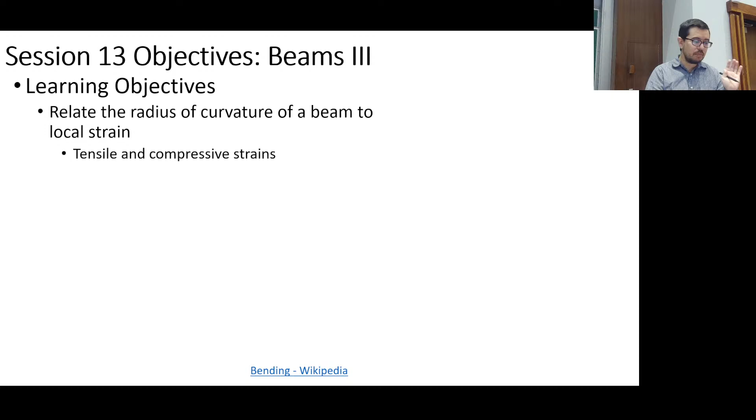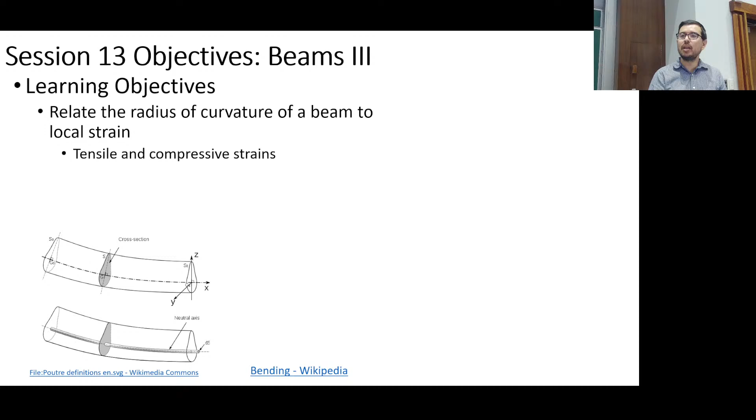So what should we be able to learn today? We want to be able to relate the radius of curvature of a beam to local strain. We're going to talk about how these beams curve, and this time discuss how that affects the strain along the beam. There will be tensile and compressive strains, and it will look something like this. Here's a beam being bent, with some radius to that bending, and we'll discuss what the local strains look like along that beam.

The other thing we'll look at is relating the internal moment to the normal or bending stresses within a beam. This is kind of a big deal, and it gets a name: it's called the Flexure Formula. Very creative, I guess.

That formula is going to be something that you can take with you, and it may even come up in an interview. It did for me for a job interview once. They wanted me to be able to calculate the bending stress along the beam. So after today, you'll have that key tool.

None of us is going to really remember all the equations we discussed in this class, but there are a few key ones we do remember. Flexure would probably be one. The difference between stress and strain. I had a friend who told me he was walking into his interview, and his buddy walked out saying, I couldn't remember the difference between stress and strain. So hopefully those types of concepts will stick with you.

And of course, we have some ideas concerning the bars, the rods, and the beams, and a little bit on the trusses. But that's really what we're covering. And maybe I'm a broken record here, but I'll say it again: if we understand how the loading that we apply to these simple structures affects the stresses and strains in them, it will be essentially pretty straightforward to figure out what the stresses and strains mean in much more complicated structures.

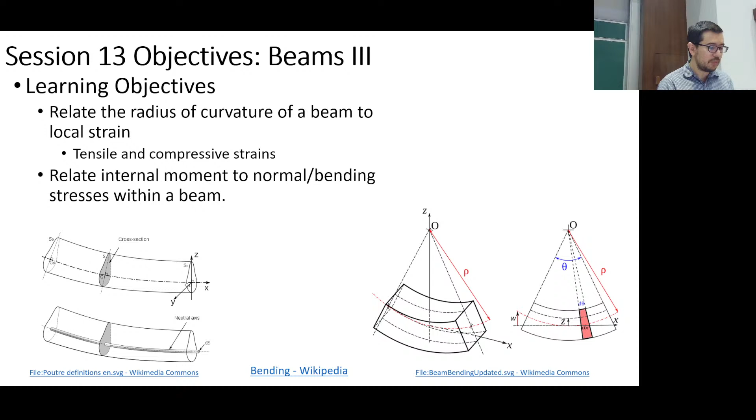That's another one of the essential pieces of information that we get to in this course. We'll talk about tensile and compressive stresses. Any questions, any insights up to this point?

How are you feeling about beams? Did you enjoy the graphing techniques you now have in your toolbox to figure out what the internal shear forces and internal bending moments are? Do you enjoy these integral differential relationships? Do you enjoy figuring out the boundary conditions on the left and right? Maybe not enjoy, but you have it under your belt, right?

Because the other key thing - and maybe this is foreshadowing purposely - we're relating the internal moment to the normal bending stresses within the beam. The reason why we care so much about calculating shear force is so we can figure out what the bending moment is. And once we know the bending moment, we have the opportunity to apply what we're going to call the Flexure Formula. The internal moment is very much directly related to the normal stresses that you have in the beam.

So in order to calculate those, it's the same old pattern. You spent a lot of time in statics trying to figure out the internal force, internal bending moment, or internal shear force. Then we said, hey, there's a way to figure out what the stress is for bars, and what the stresses are for rods. And so we're going to do the same today, except for beams.

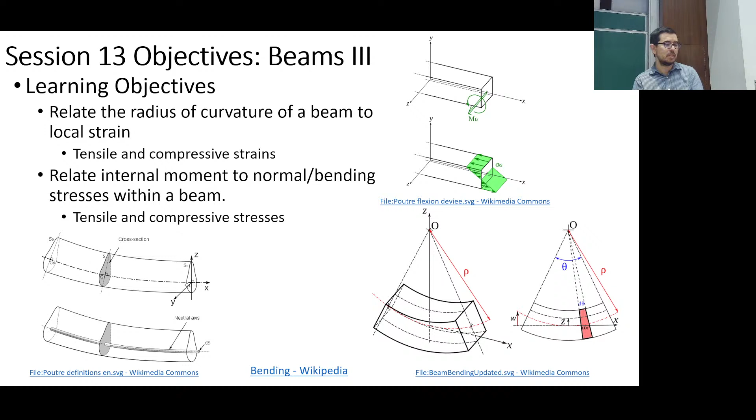Now here's kind of a review. What are we talking about here? We're talking about one of the very simple base cases for a beam and a transverse load on a beam. This is a cantilevered beam, and it has load P on the end, and we've already done this problem. In fact, twice you saw that I made mistakes in the slides on this exact problem.

You apply external - I'll go through this quickly, don't worry too much - but we would go through external equilibrium. We're going to know that we have a reaction force and a reaction moment on the left side; a wall gives us those two constraints. We are going to sum the forces in, let's say, the vertical direction, and we get that R and P are equal to each other.

We're going to sum the moments about a particular spot. In this case, we selected O, and they have to be equal to 0. So then we have our MR and our PL—that's just for the external equilibrium. MR is going to be equal to PL.

So what's next? We have different options. We could do straight up equilibrium like I did last semester, or use the integral differential relationships. In either case, now that we've talked about this quite a bit, it's not a bad idea to look at the values just to the left and just to the right.

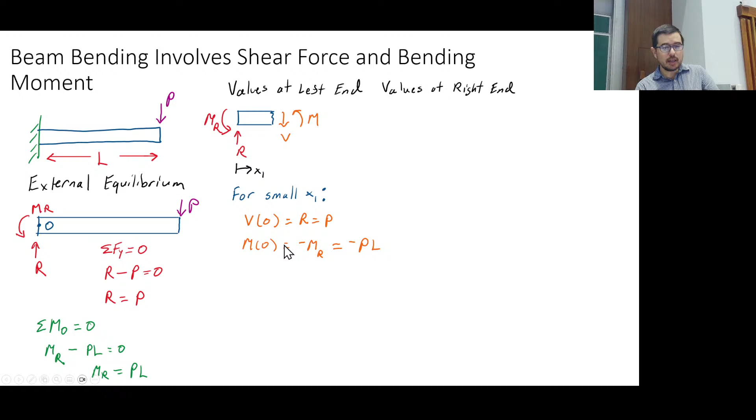And for the right side, we're going to do a similar drawing. At this point, I think we went through things a little bit fast at some points in the last meeting, but there should be an appreciation now for how going from a different direction affects how we plot things.

Maybe the simplest examples are when you have that concentrated moment or a concentrated force. If I'm going from left to right, and I have a force applied upward located along the beam, that's going to be a delta V going from left to right, positive F, whatever that applied force would be, upward. But if I'm coming from the right side and I hit that force going upward, that's actually a jump down. And the same thing is true when you have these concentrated, or coupled, moments.

So here we follow the convention—and again, I'm probably saying it ad nauseam—externally, when I chose this R and this MR, I didn't really reason it out, I was just using whatever my gut told me would be a great idea. But ignore that gut feeling when you start looking at the internal bending moment and internal shear force. You've got to follow the convention.

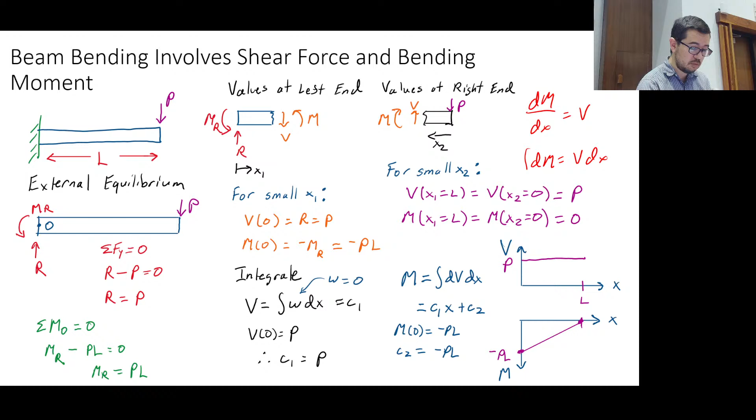Yes? Why for the moment equation for the integral is it dx? Okay, let me just write here. Remember that we have that dm/dx is equal to V. So then I multiply both sides by dx, and then I take the integral. All right, no problem.

Now once we have this ability to write out these shear force and bending moment diagrams, we're doing awesomeness. That's great. What does it really look like though? These are going to be my very crude drawings. So that is a beam.

I've drawn these boxes so many times. My daughter came to the office one day, and multiple kids came to the office, and I was drawing. I was like, okay, so what do you do? I was trying to draw something just on the chalkboard for them, and I did this very simple perspective. They said, wow, you're good at drawing. I said, no, not really, I just know how to draw boxes.

Okay, so here's a box. All right, let me see if I lost my thing. Hold on a second.

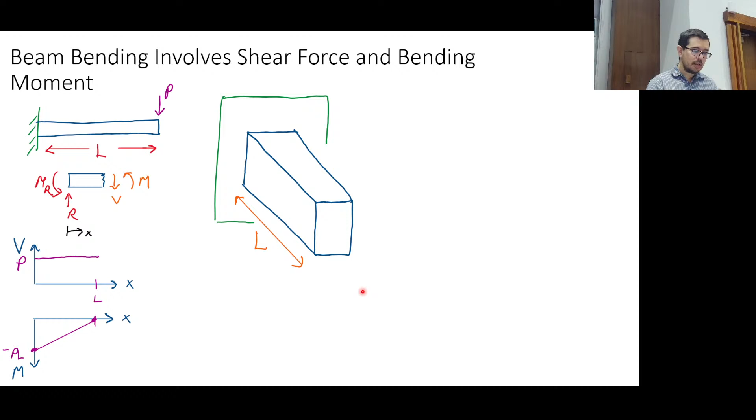All right, so here's our box, and here is the beam that's kind of connected to that box. It has some length, and it has some force P, like we see there. If we slice this system, as you see here, that's my way of saying it's sliced. Imagine you have a really bad knife, making the edges all look serrated like the knife itself.

I am going to draw a shear force that is following my convention. So what is my convention? If I look at this thing, I've kind of cut the right side, or removed the right side, I'm covering up the right side. Remember this convention, this is the V that I have, so that's going downward. So if I slice it and I'm looking at it here, my V is downward and my V is equal to P. So that should give us a little bit of an idea of what's happening.

Now, we won't talk about these shear forces today. We are talking about the shear forces, but we won't talk about the shear stresses related to the shear force today. But can you imagine? This is a force acting on a surface parallel to the surface. So what does that mean? That means there are going to be shear stresses that have little itty bitty forces associated with them on the little dA's. But we're not going to talk about that today.

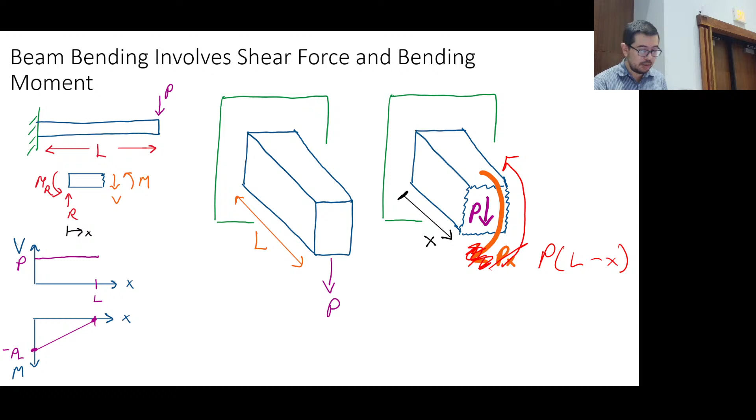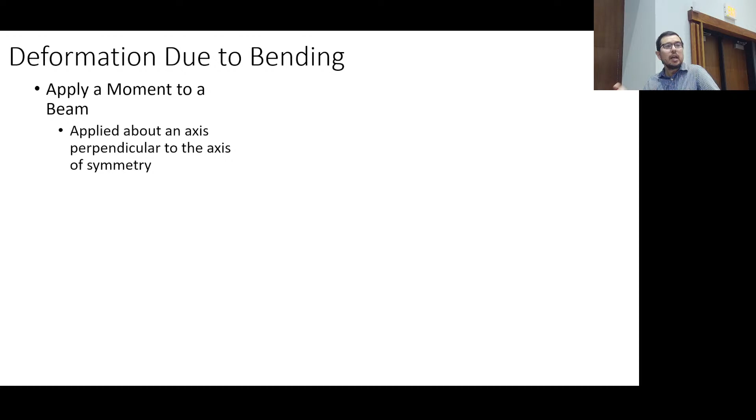Let us continue. So if you already have an idea of how to apply a torque to a shaft, right, essentially you can think of it as the screwdriver, the length of that shaft going into the screw that is trying to either tighten or loosen, okay? So now what we're going to do is apply something that has units of force times length, and we're going to apply that to a beam. Okay, so here's another one of our beams.

And we're going to say that it has some coordinate system like this, and we're going to apply some type of moment to it. All right, now...

If I take this lovely chalk eraser, this is going to make my hands all messy. All right, and this is hilarious too - this is not really for chalk, right? This is actually a dry erase, yeah, it even says it. Okay, but anyway, if I take this, now you see I've got a moment that I'm applying. That's actually pretty - this is the power of surfboards right here. Anyone surf? Right, we had a surfer, right? Yeah, you surf, right? So why is this demonstrating the power of surfboards? That's right, it's got a foam core, right, and that foam core is pretty thick, actually, right? And it has a very, very thin shell around it, which is usually - well if you use the kind of boards that I use, they're cheap, so some type of fiberglass, right? But high-end stuff now people use carbon fiber composite and all that jazz, right, or straight up epoxy, it just depends.

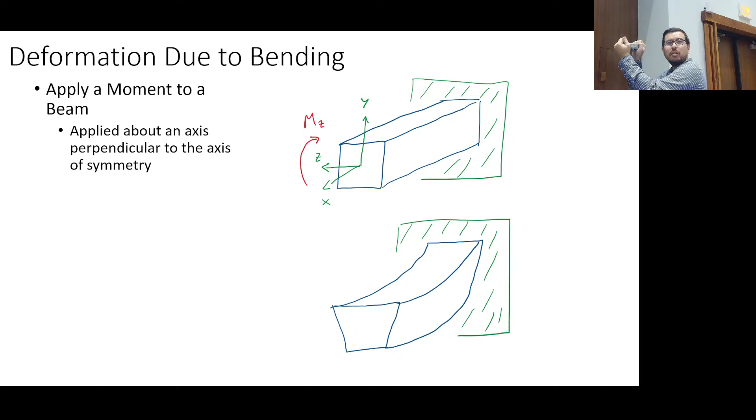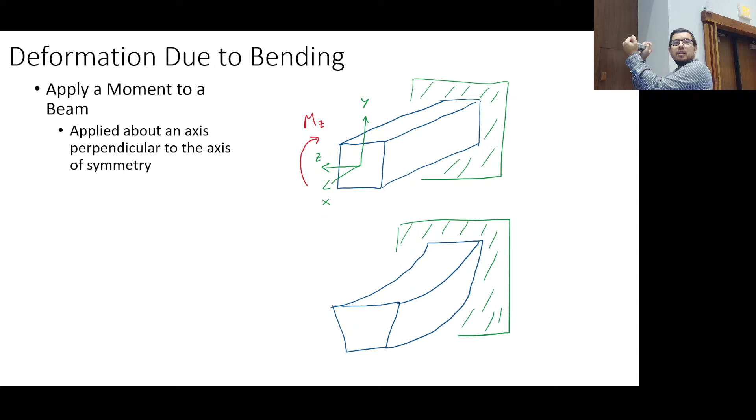Or eraser, better eraser, right? If you apply this type of moment—or you take that, is that electric? Is that electric over there? All right, yeah, those are fun. I've only been on one for a couple seconds, but they're fun. Okay, so yeah, whatever, I got—that's an awesome thing.

All right, I'm distracted. Okay, so you see that as I'm applying this bending moment, the top is going to be in compression. One way to look at it: this point here and this point on the top—both of these points, as I apply this moment, are getting closer to each other. And the points here and here on the bottom are getting farther apart. That is quintessential compressive strain and tensile strain.

Yes? So how does this compression relate to the buckling of the material once you push even harder? Okay, so buckling by definition is not related to the strength of a material—it's related to the stiffness of the material, the elastic modulus. We're not going to cover buckling this semester, we'll cover it in the next class.

But yeah, what happens is if you make your beam super long, there becomes what we call a slenderness. Like if you take a constant cross section—if you take me and extend me by two feet, I'd be a reasonably sized basketball player. Well, actually, a foot and a half would do it. You get a basketball player. I'm okay with my body image.

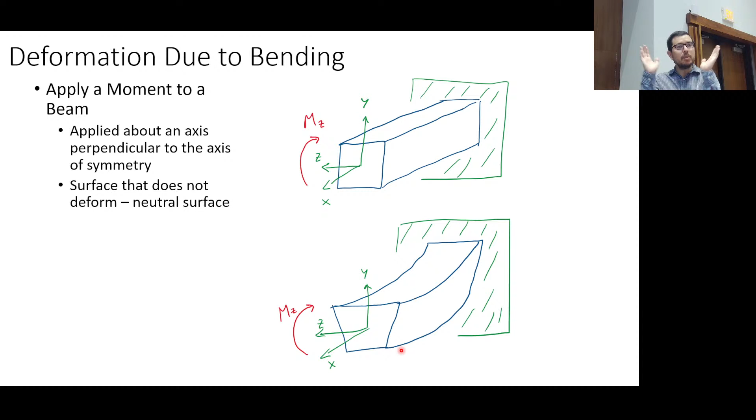There is a surface, okay, and it's not my Microsoft Surface. It's a surface that is called the neutral surface that actually does not deform. Can you imagine that? What are we talking about? We see that this top is in compression and this bottom is in tension, and probably you can even see this business of the sides, it goes wider at the top and skinnier at the bottom. So there is a region, a surface, where it does not experience any strain.

This is key. If you are a designer and you have something precious that you don't want to experience deformation, a good place to put it is on the neutral surface, because it's not going to experience any tension or compression there.

And so John Rogers and his research group, they have leveraged this idea quite a bit, this very simple principle, in flexible electronics. Even when you take your handy-dandy extension cord from the wall, you notice that there's insulation wrapped around it. If not, well, it wouldn't be very good to handle. So if you take that cord and bend it, part of the insulation is undergoing extension and part is undergoing compression, and the material in the middle, if it's close to the middle—and of course you have conductors that have some thickness to them—but the thinner that wire is, the closer it is to the neutral axis, you can actually bend it quite a bit. And nothing is ideal, so if I bend it back and forth a lot of times, eventually it's going to fail. But you're going to see that the insulation, even though it's rubbery, might fail before the wire itself in the middle would fail. And that's because of the physics of this neutral surface.

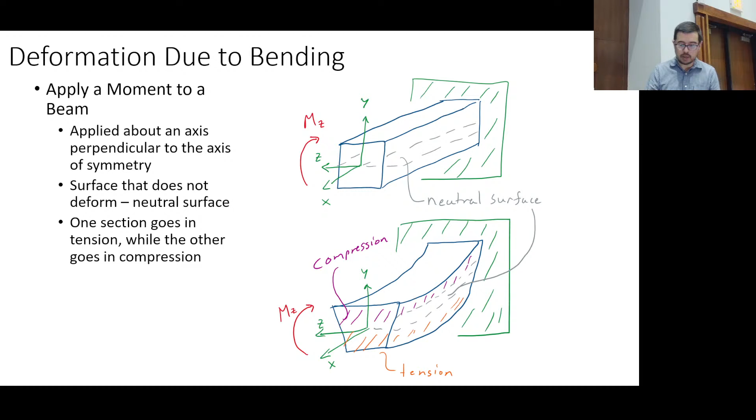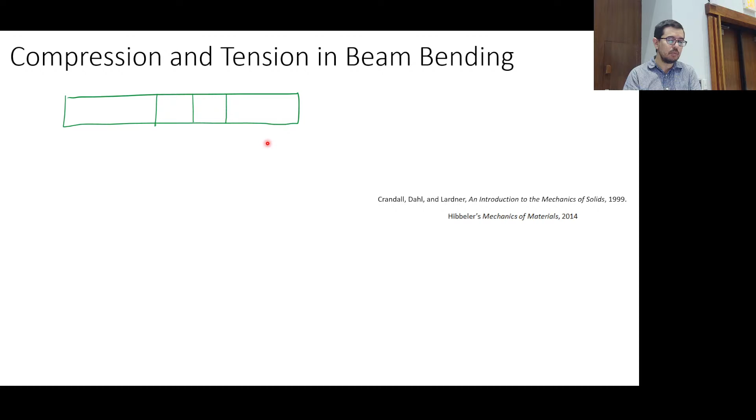Now, let's take our beam and break it into a few different sections. So this is a beam, going from left to right, and we're just breaking it into sections, and we're going to call these different sections by their names. So we have like an A, B, D, E, or A, B, E, D section. You have a B, C, F, E, or D, E, F, C, whatever—you have these different sections. And we're going to put a bending moment on this beam, and we're going to look at what happens to A, B, the relative distances between A, B, C, and D, E, F. And you already know, after that whole discussion, what's going to happen.

You know that if I apply a positive bending moment—what is a positive bending moment? A positive bending moment is when you have our convention in place, and whoop, that means smiley face. So we're applying, you see that, these are our conventions: on the left side, it's clockwise, on the right side, it's counterclockwise.

We can see that A, B, and C are going to get closer to each other, while D, E, and F are going to get farther from each other.

So we can call... and you remember we kind of did this when we were talking about the pizza and the torsion on a rod, right? We had all these stacked pizza slices, and a little pizza, and I was like, hey, how does this location move relative to this location when I twist it? We're doing something very similar here.

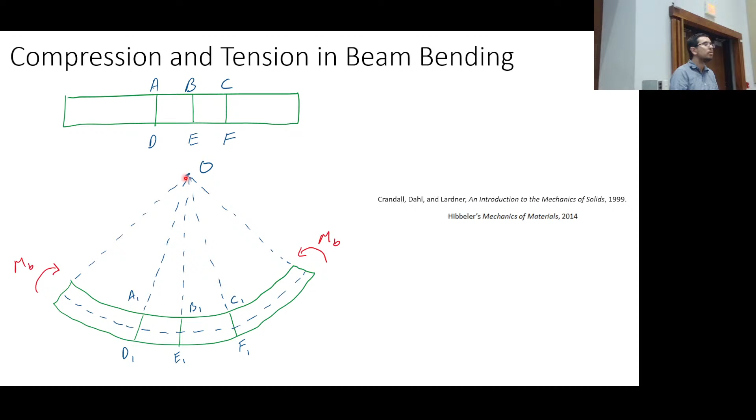So D1, E1, and F1, those are going to describe the new locations. And what we're going to see here is that now there is a center, point O, for the radius, or for the circle essentially, or the semicircle that we are carving out with this bending.

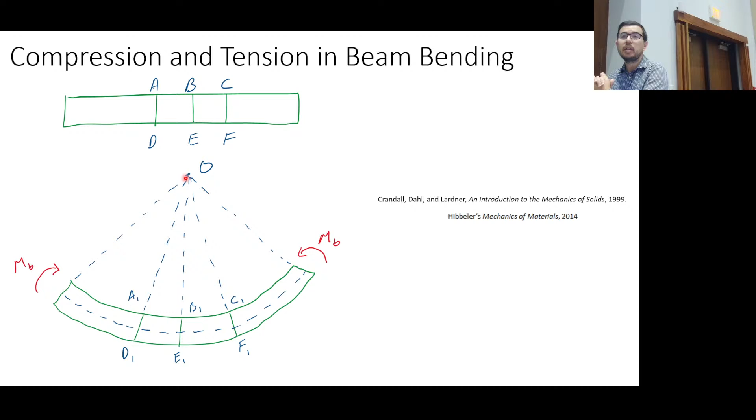The length, what do you think we're going to call the length? Well, we did it in shafts too. We're going to call that length, or that radius, rho. So rho is going to be what we use to describe how far we are from the center, right?

And we discussed that C was... okay, don't worry, we're not there, but this is focused on rho. Remember, C was the actual radius of the rod or the shaft, right? And then rho was the distance from the center line to some location. So rho, once again, is going to be what we use to define a radial distance.

And then we can see that even though you see A1 and B1, they're closer to each other, D1 and E1 are farther apart. Well, maybe it's not very clear from my drawing that A1 and B1 are close to each other, but you see this, that we are carving out some angles here, okay?

That if I can look at the angle between A1, O, and B1, right? Or I can look at it from D1 to O to E1. And I guess I could have been a little bit more careful and said, hey, this length here between A and B is going to be the same as this length here between B and C, as is like the initial lengths between D and E and F.

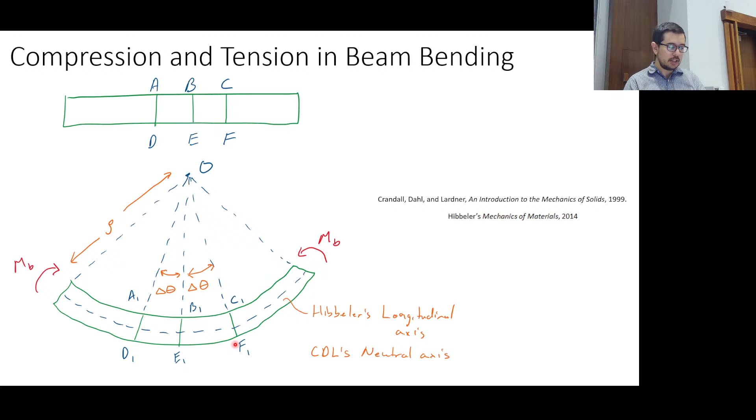Okay, so let's take a little bit deeper look at a slice of the beam. So now same thing, and this is the undeformed state or undeformed elements in the beam, and we're going to go ahead and take a look at...

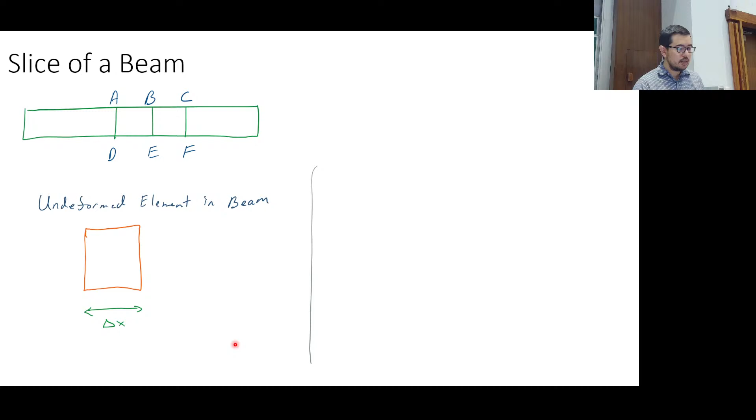It could be, this could be A, B, D, E, but really small, whatever it is, right? There's going to be now, but we're now talking really small, and this is going to be having some width of delta x. And the longitudinal axis, or the neutral axis, is going to go through it. You see this? We're doing another derivation, and what does it involve? It involves taking a slice.

Now we're going to define a distance. You saw we had this rho, that was a radial distance from the center line to some location in the beam. But there's also something we call y, and this is the distance from the longitudinal axis, or the distance from the neutral axis.

Initially, delta S is going to be equal to delta X. Delta S is the length between this side and that side. As we bend this element, what's going to happen? Delta S is going to change as a function of y, because if I'm bending with a positive bending moment, this bottom portion gets wider than this top portion. So now we've got this parameter delta S, and for very small widths, a line is very much like a curve, but let's just say this is the arc length, or the length, either way. So in the undeformed state, delta S is equal to delta X.

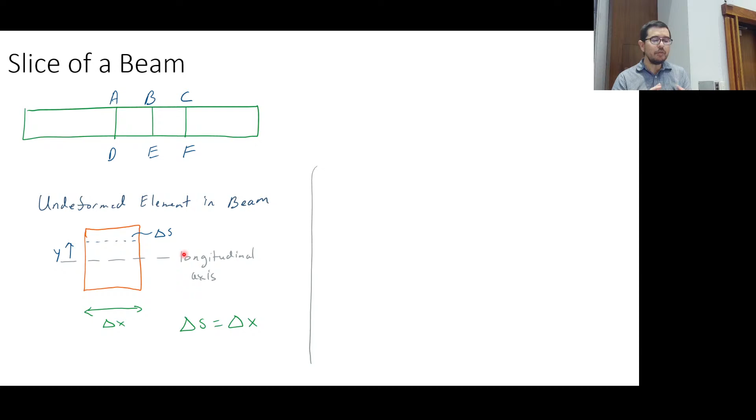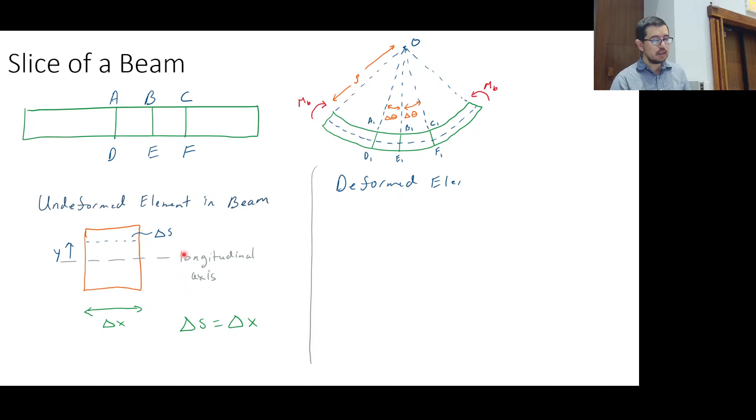In the deformed state, which is what we had in the previous slide, this delta S is now varying as a function of y. But first, let's set things up. This is the delta theta, going between A1, B1, E1, D1. And we had this thing we called rho, describing some distance to wherever we are. Let's say that distance is going to the neutral axis, and we can say that this delta X is going to be unchanged along this longitudinal axis. So the delta X here is the same as this delta X here.

And what do we do next? Well, we can define the new delta S as a function of y, as what we'll call delta S prime. And how do you relate strain to changes in length? What's the definition of a normal strain? It's the delta in the length divided by the original length.

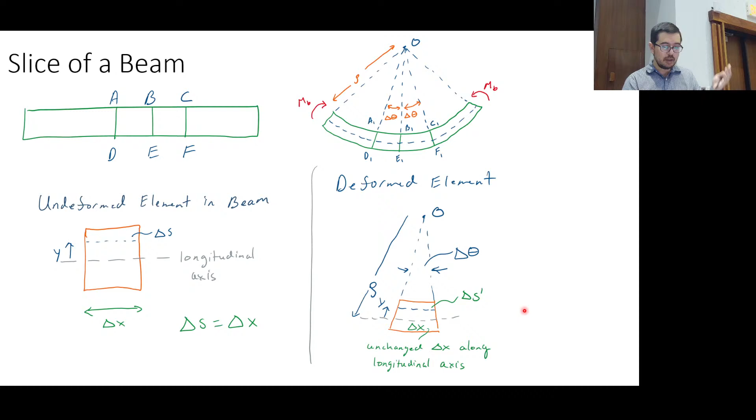So what do we have here? We have a change in length, like delta S prime minus delta S. And what's the original length? Delta S, or delta X. So now we have a way to figure out what the normal strain is as a function of a few different things, but y in particular, and rho.

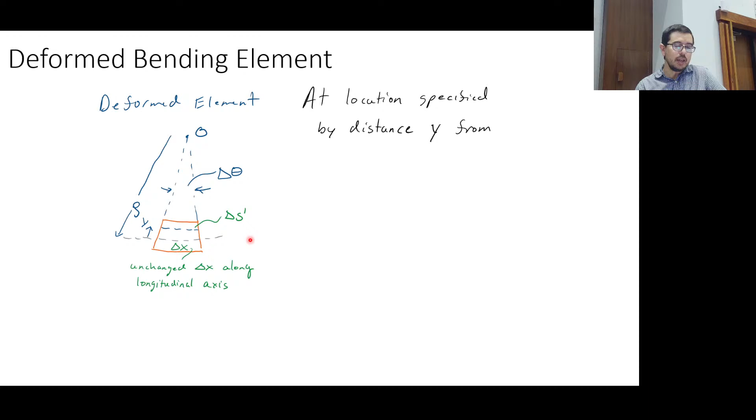So we have this, just copied and pasted, the same diagram. At some location specified by distance y from the longitudinal axis, we can have some delta S prime. And if we do a calculation of the normal strain, epsilon at some distance y is going to be delta S prime minus delta S over delta S. I didn't say the limit of that. And if we look at things, we can say the original delta S was equal to delta X.

And here's a new thing: if we say rho is the distance to the neutral axis, then rho delta theta is also equal to delta S and delta X. That's the arc length.

So now, what is this essentially, this delta S prime? Look at it: rho minus y is going to be a new radius to here, from O to here, and if I multiply by delta theta, that gives us delta S prime. So delta S prime is equal to rho, quantity rho minus y, delta theta.

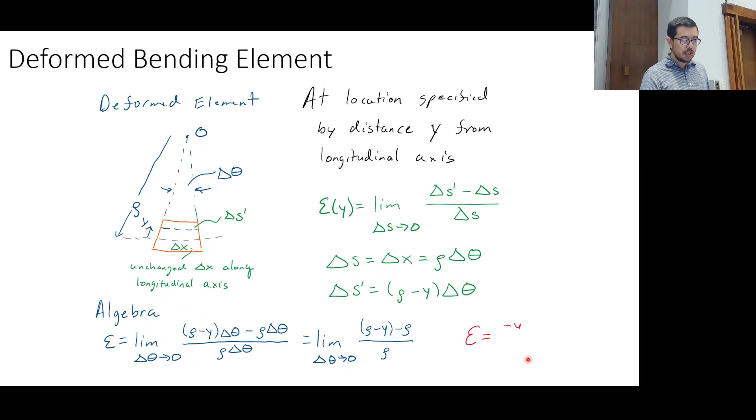And we do a little bit of algebra. This delta S prime is this, this delta S is rho delta theta, that's the denominator. We divide everything, we've got delta thetas all over the place, and then we have rho minus y minus rho. Well, rho and rho knock each other out, and we get that the strain is equal to minus y over rho.

This equation is not something that you're going to write home to your parents about. Okay, maybe the next equation we talk about on Flexure Formula would be something to write home about. I don't know, my parents probably wouldn't care, but maybe some of your parents would care. It's like, hey, I learned the Flexure Formula. It's like, yeah, all right, that's great, welcome to the club. Okay, but this is not that yet. But we're going to use this equation as we go further with our derivations.

Epsilon is equal to minus y over rho. And you should, of course, write this equation in your notes for the next exam.

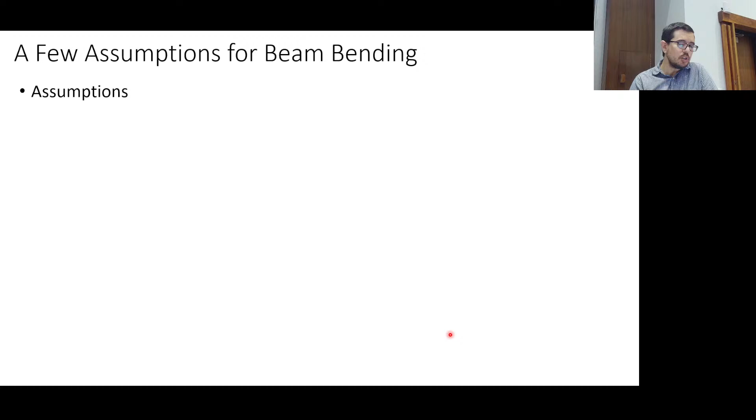Okay, so here's some assumptions. The longitudinal axis on the neutral surface does not experience any change in length. It curves, true. Okay, so we already kind of said that, that this is where you don't have any change in the length.

All cross-section planes remain perpendicular to the longitudinal axis. So this is just kind of saying, if I am interested in my bending moment and my shear force at a particular location, I take a slice, and it's going to be perpendicular to the longitudinal axis.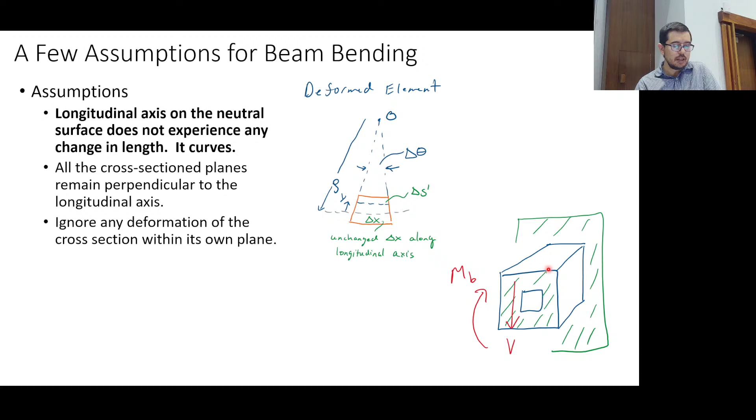It's not very clear here, but it's perpendicular to the longitudinal axis. Okay, that's nice. We're going to ignore any deformation of the cross section within its own plane. So we're not going to care too much about what's happening in the plane that we're slicing. And the normal strain is going to vary linearly with the distance from the longitudinal axis. That we've already said, and that is true.

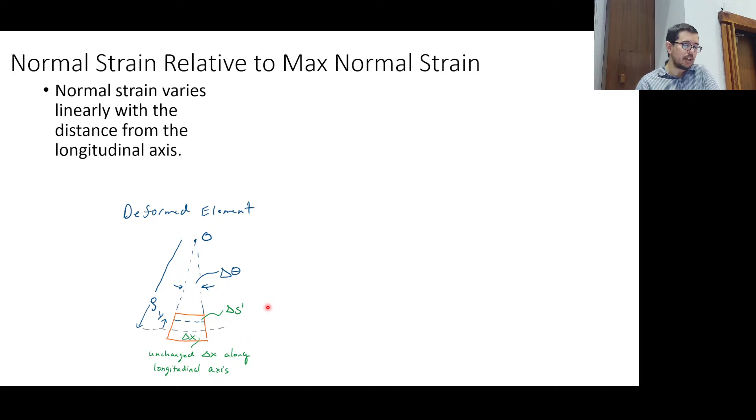And do you see that, just using this formula that we just described? Except now we're saying that, before it was minus y over rho. When you get to the outer surfaces, that strain is going to be the most positive or the most negative. And so sometimes, this is often more used to describe the stress along a beam at a given location, but here we're using it to describe the strain.

What do I mean? I mean you have a line that has a slope that goes through 0 when it's at the longitudinal axis or at the neutral axis, and it increases, or becomes less negative, or becomes more negative, or becomes more positive as you move away from that longitudinal axis. Okay, everyone see that?

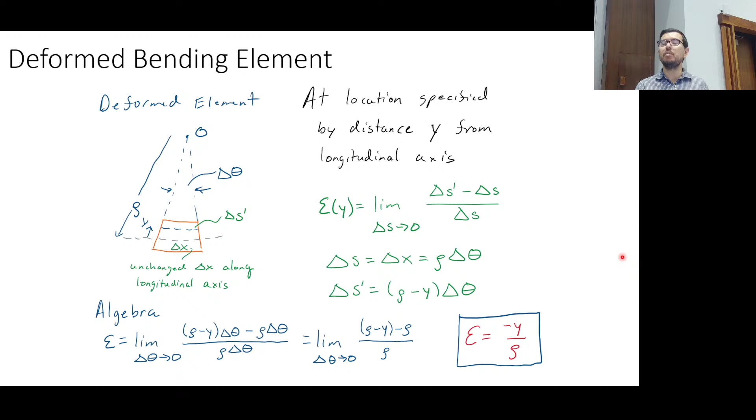What we've described so far is a strain. Right? A strain is equal to, right, we go back here. That's what we know at this point. We know that we have a strain equal to minus y over rho, but we don't really have a way of saying, hey, that rho is this for a given amount of bending moment, because it's dependent on a few different things.

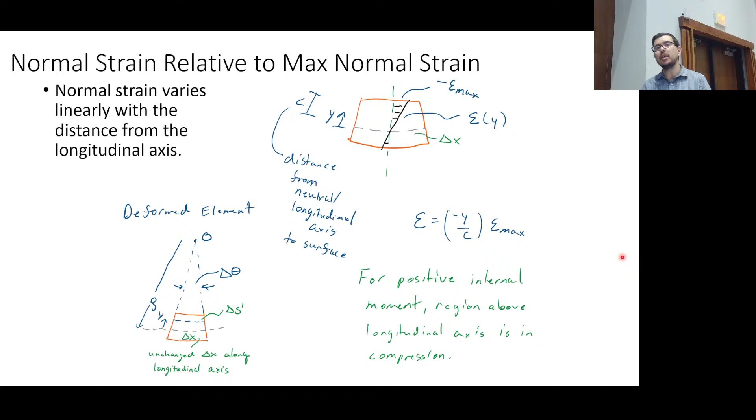Okay, so for a positive internal bending moment, the region above the longitudinal axis is in compression. And again, we've said that already. And the corollary is going to be that the region below the neutral axis is going to be in tension.

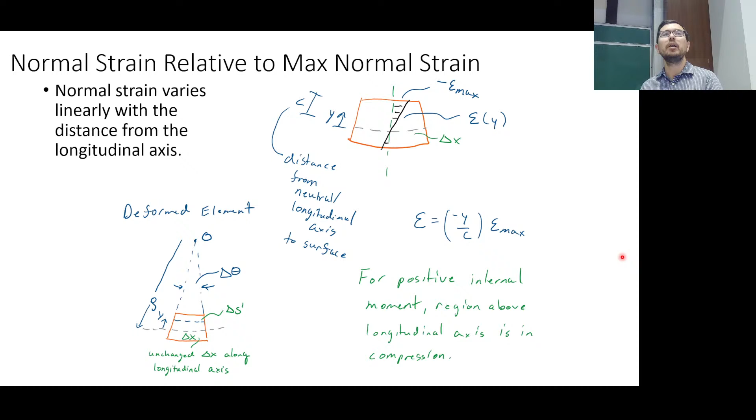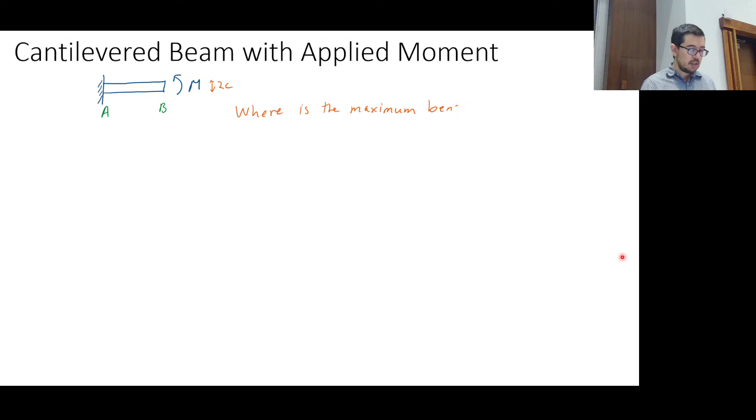Okay, so now, here's the cantilever beam with applied moment. And when we have a thickness of 2c, okay, that might not be clear, that's 2 times c, that's the thickness. Where is the maximum bending strain?

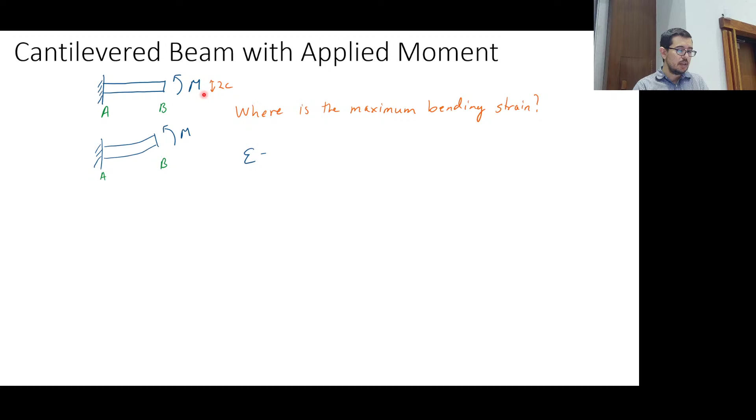It's not a trick question. It's going to be at a distance c, okay? And so, if we draw this thing out like this, right, it's going to be where we have c. This equation gives strain at an arbitrary distance, and the maximum bending strain is going to be where we have y equal to plus or minus c. So it's very important to remember that the maximum bending strain will be along the top or the bottom of the beam.

If the strain is a maximum at a given location, what does that mean about the stress? Assuming that we have a linearly elastic, isotropic material, it means that the stress is also going to be maximum there, right? Hooke's law, in whatever form we take it: sigma equals E epsilon, or the strain is equal to 1 over E times quantity sigma x minus nu times quantity sigma y plus sigma z, whatever we have. So that's where we're going to start seeing the maximum bending stresses as well.

So have you ever thought about that? There are a couple interesting things that this means. It means that your beams are experiencing maximum bending stresses at the outer surfaces. It also means that if you can strengthen the outer surfaces of these beams, that will prevent failure, right? Because there's no strain on the longitudinal axis, we just talked about that. So if you're worried about trying to make something that's going to be under bending stronger, what you want to do is make the outer surfaces stronger.

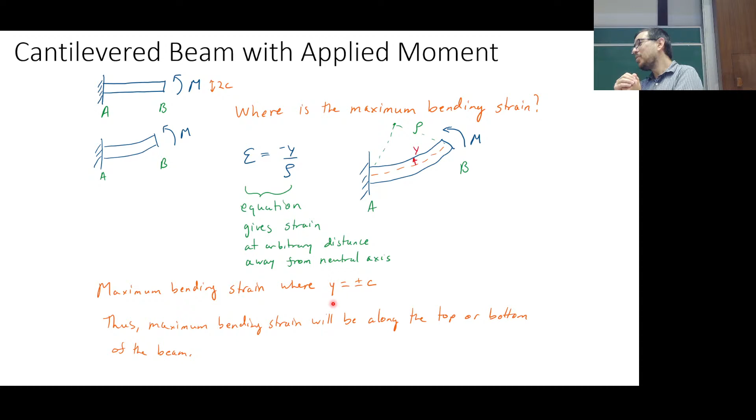Is the top always going to be like a circle? Well, if you have a nice, pure bending moment applied, yes. But will I give you that on an exam? No, unless maybe it's a thought question. But we're going to have transverse loading like a P, a couple force, a couple moment, applied force. External force makes it more complicated.

Distributed force, right? Yes. So just to clarify, the rho is always measured from the center of the radius of curvature, whereas the c is always measured from the neutral axis.

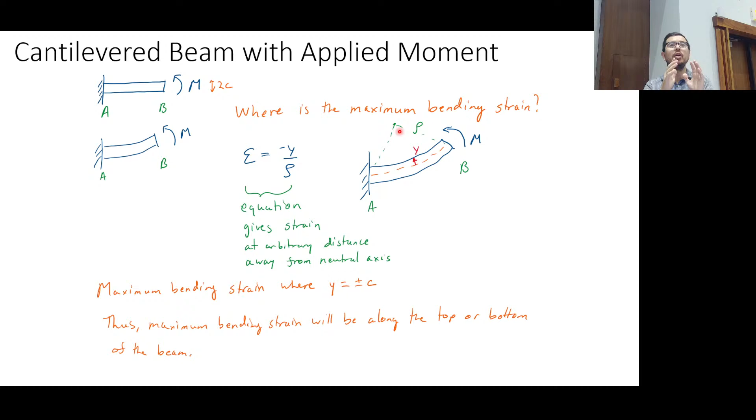Okay, so what I tell my kids about superlatives is try not to use them. You know, maybe I'm creating politicians, I don't know. So 'always' is a strong word. But yes, the rho is going to be what we usually use to define the angle of rotation between some center. This center can be moving, there could be multiple centers. If it's not a perfect circle, you could say, oh, at this location, since I know this is the strain and this is the y, that's the rho. And yes, the y is the distance from the longitudinal axis, and c would be the distance between the longitudinal axis and either the top or the bottom. And there are ways, the neutral axis doesn't always have to be smack dab in the middle, it's at the centroid.

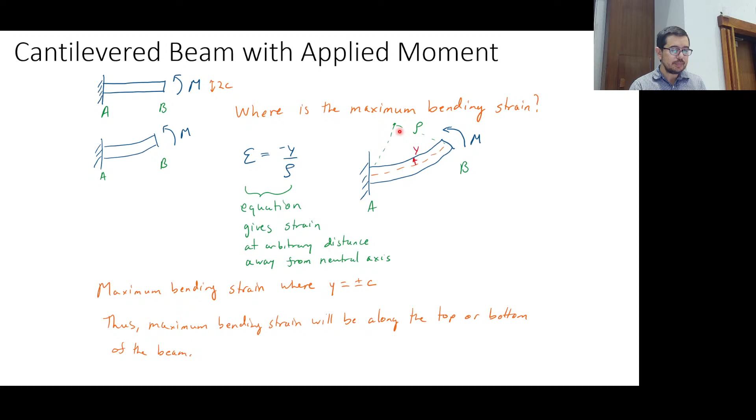All right, now the Poisson ratio's effect. The portion in compression can have a larger cross-sectional area with deformation. The portion in tension can have a smaller cross-sectional area with deformation. Yes, we believe this. All right, and we need to keep going here.

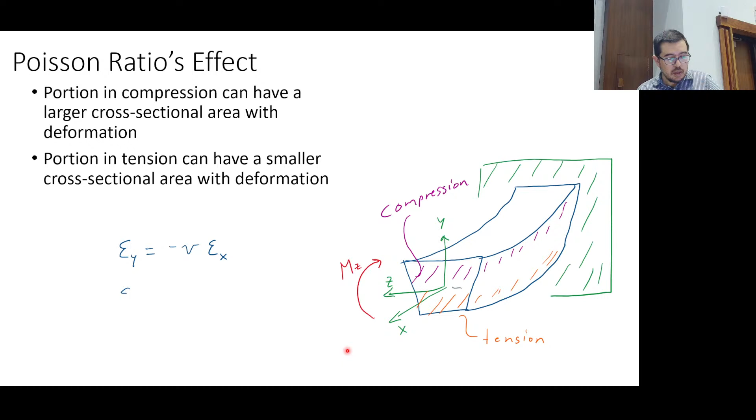But epsilon y is equal to minus nu times epsilon x. Okay, this is a true statement, and epsilon x in our case is along the longitudinal axis. And the same thing for epsilon z. All right, so let's keep going. This one's pretty straightforward, and it's pretty much just using the relationships that we said here.

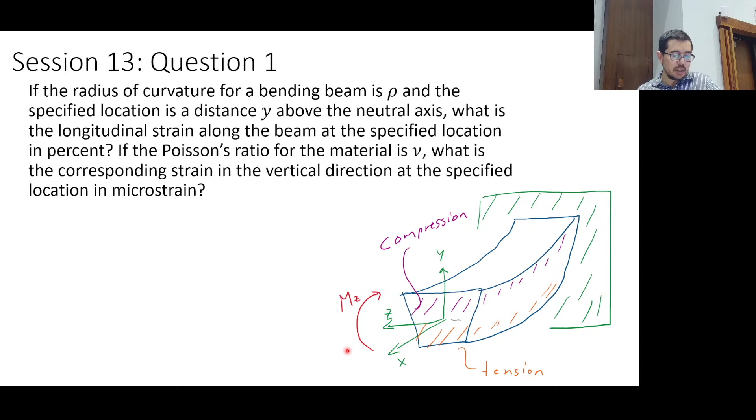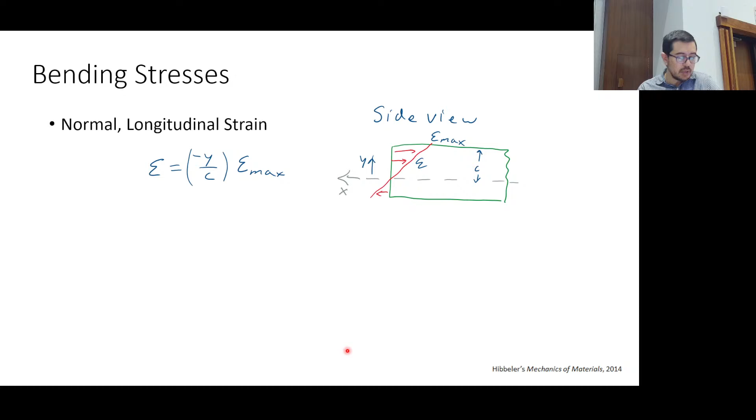Now, bending stresses. We've already defined the normal longitudinal strain. And if we look at this from the side view, you have this relationship that epsilon is equal to this quantity minus y over c times epsilon max. Now, Hooke's law tells us that for a uniaxial case, sigma is equal to E epsilon.

A bending stress is going to be what is the stress due to this strain. So you see what we've done here? We've said there's a minus y over c, keep that, there's an epsilon max, that's fine, I'll call it sigma max, and I'll divide by E. That gives me epsilon max. And epsilon is just equal to sigma over E, so I put that on the left side. So this is why that relationship was so important. The epsilon equals minus y over rho is now going to give us a pathway towards calculating out what the stress is.

Yes, we do care about deformations, but it doesn't really matter from a design perspective if you have the ability to calculate deformation but your stresses are through the roof and the thing is breaking or yielding. This is something to keep in mind with finite element analysis. With linear elastic materials and simple models, it's going to give you stresses and deformations regardless, but if you don't compare those to the material limits, it's kind of garbage. Anyway, that was another digression.

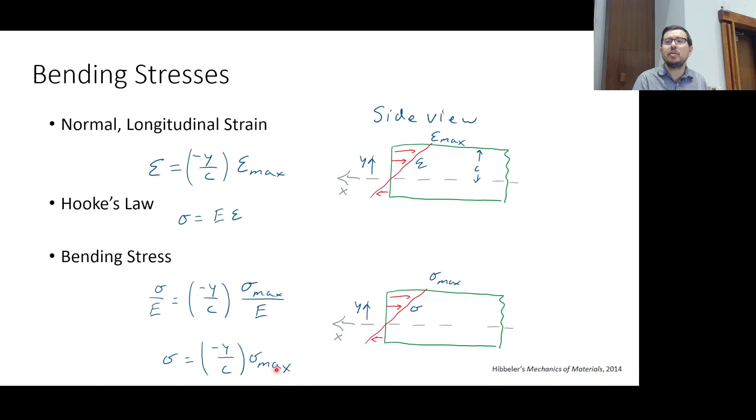What we see here is that there's going to be some bending stress, sigma, equal to minus y over c times sigma max. Again, that's not super useful because I don't even know what sigma max is. So what do we do?

We're going to take a look at how we can visualize the stresses on a sliced surface. Here's the idea: if I have a positive bending moment, the bottom region is under tension, the top region is under compression, and it varies linearly.

We've established this algebraically as well. If I think about all these stresses and take some small areas dA, each is like a little bit of force, sigma dA. And force offset by a distance is a moment, a torque. We have moment here, so you see where this is going.

There's something we have to introduce called the first moment of area. We'll get to that in a second, but here we have sigma equals minus y over c times sigma max. The summation of the forces has got to be equal to zero, and a force can be the integral of sigma dA. So if I take the sigma dA over the entire cross-sectional area and sum them all up, that has to equal zero.

That's because the second law tells us with statics that when the acceleration is zero, the surface is not accelerating.

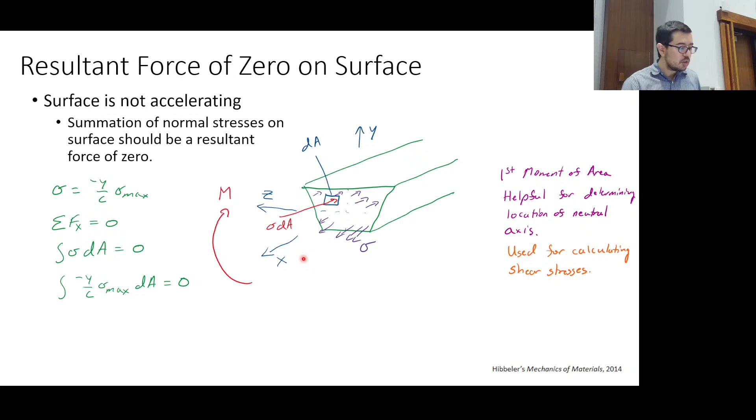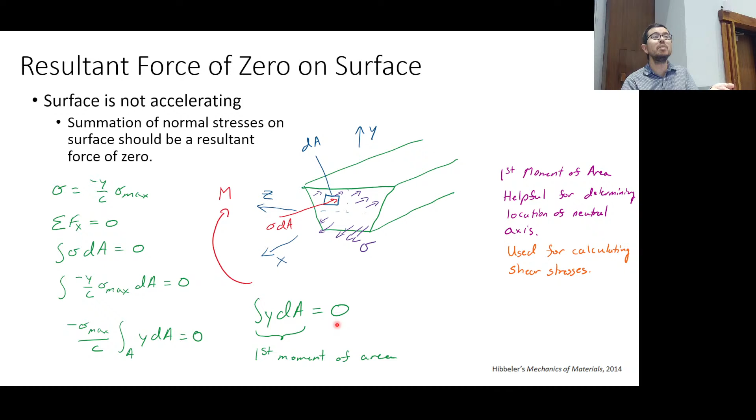But that was our discussion of equilibrium for the forces. What's our next type of equilibrium? Equilibrium for the moments. So when we have this cross-section, the summation of the moments has got to be equal to some moment M, because we see that here.

We can say that M is equal to this integral, y sigma dA. Remember, y is the distance away from the neutral axis, and sigma dA is the force at a particular small area. These dAs could be slices across the entire beam now, because we have a y and this sigma dA, and that dA could be across the entire cross-section.

So we have y sigma dA. Sigma can go in here, this is that big mess. We had y here already, and we had another y, so that becomes y squared. Now we have that the moment is equal to minus sigma max over c times this integral of y squared dA.

This is a geometric quantity. Both the first moment of area and the second moment of area are things dictated completely by geometry—there's nothing in this that says force, moment, or stress. This is completely based on the geometry of the cross-section. And then we define this second moment of area as the integral of y squared dA—that's I.

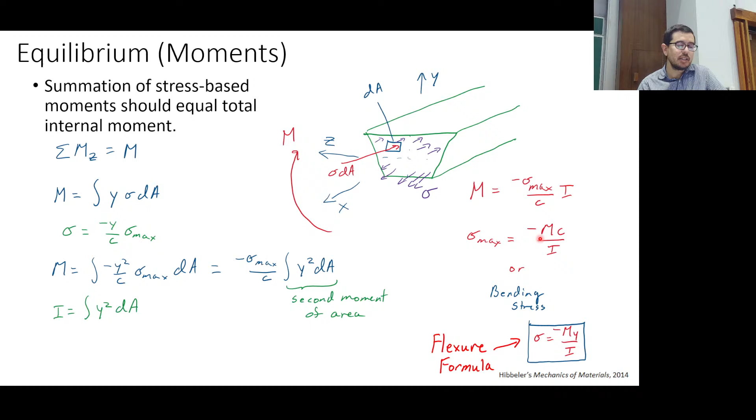minus my over I. You see that? Because this is the maximum, right? But if y is equal to 0, then it's 0 at that location, right? Because there's no strain there. There's no stress there.

So we said it varies. That strain is going to vary linearly from y equals 0 to y equals c, the outer location. So now we can just plug in y instead of c, and that gives us the bending stress.

This is a historic equation. This is one that you want to have in this class, in DMC, and many of your other classes. Ask your upper class peoples, what equations do you use after mechanics of materials?

They'll say, well, we use sigma equals E epsilon, yeah. But then say, hey, do you remember the flexure formula? And if they say no, then you say, you better go talk to Aaron about that, because he wants to meet with you. No, don't say that. But this is one of the key formulas that we all want to remember.

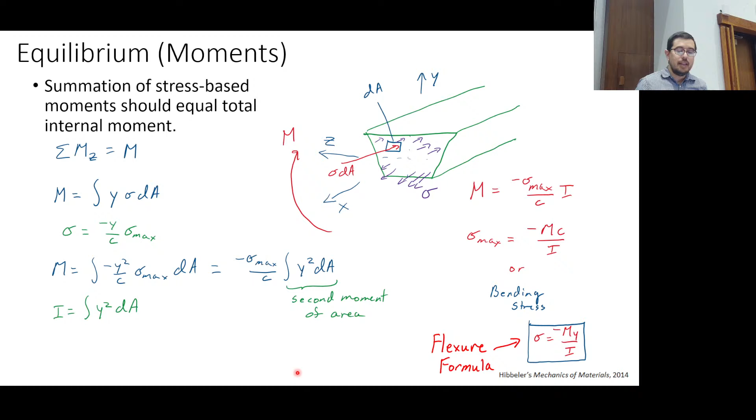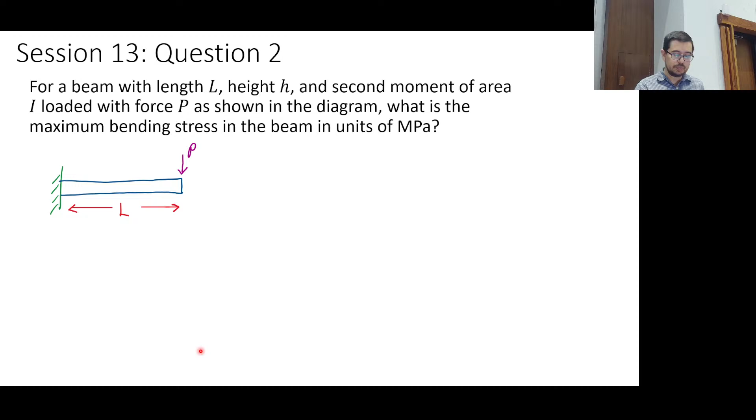Okay, so question 2, which I guess I will take some time to do with you all in a video afterwards, we'll refer to this equation. And if this is the simple beam, not with a constant bending moment across it, right? It's varying, it goes from minus PL to 0. And the maximum is going to be dependent on some other things.

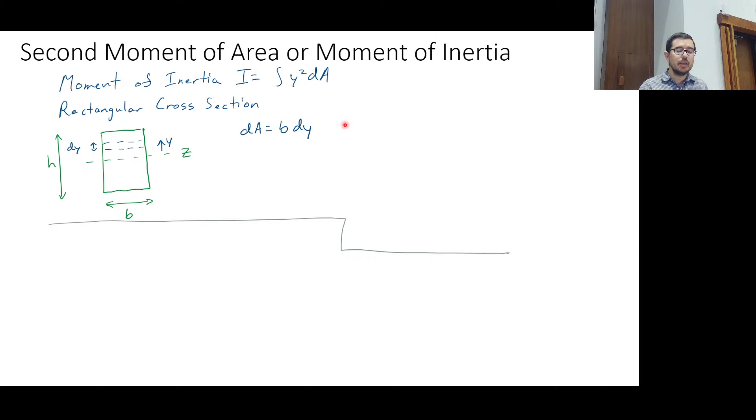All right, so let's talk about second moment of area briefly. I might have to put this in a video as well because we're running out of time. Briefly though, the second moment of area is this integral of y squared dA, and there are going to be relationships that you learn that will also stick with you forever.

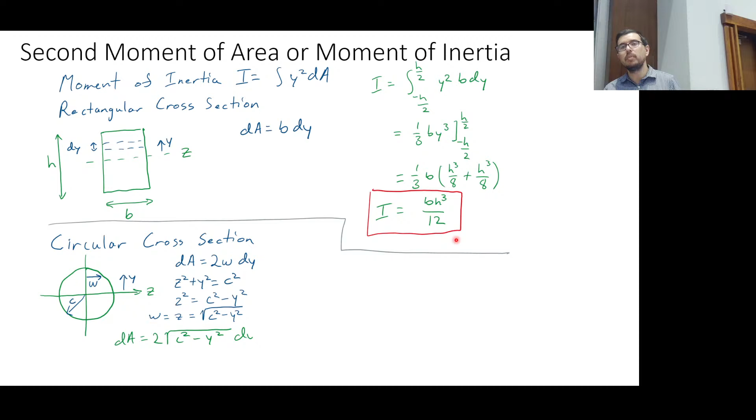So for this given cross section, you're going to have this thickness having a very large effect on the second moment of area. So we talked about minus my over I. In a lot of respects, if I is really big, that means the stress is going to be small for a given amount of m, right? Sigma equals negative my over I.

So a lot of times you want to make it large, but not too large, because otherwise you got to use a lot of material, and it's going to be heavy. So you're thinking about how do I make a big I so I have a low stress from bending, right? That's a design thing.

So if I look at a cross section, and this is kind of classic, if I take a piece of paper, I don't know, this is someone else's piece of paper. Is the thickness large? No, flipsy flopsy, right? If I turn it sideways, is the thickness large? Yeah, very, very rigid. Now there's some buckling going on here, okay, so yes.

But you see, just by taking your structure and flipping it to have a large cross section in the direction corresponding to the thickness relative to the bending moment you applied, you make a big difference. So if you're building a bridge, maybe you want a lot of vertical thickness. How do you do that? Well, I-beam, right? That's how you can get that high I using a very little amount of material.